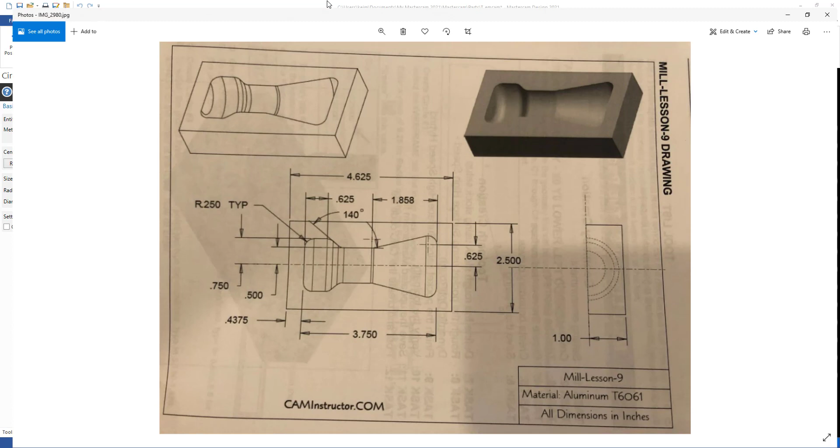I'm going to draw the right-hand arc up in the upper right-hand corner first. I'm going to select my circle and create the center point of that. I'm going to make my 0 at the edge here, shifted over this 7/16 dimension, so 0, 0 is right here where my cursor is. It just makes things easier for drawing it, and then I can translate it later. Just so you understand how my math's going to work.

We're going to start out by drawing this circle, and we're just going to take 3.75 and subtract a 1/4 inch, and that's going to give us the center of that circle. And this gives us our y-axis. So our first one is going to be 3.5, 0.625. Looks like I wasn't clicked over. 3.5, 0.625, enter. And I'll enter my diameter of 0.5 because it is a 0.25 radius.

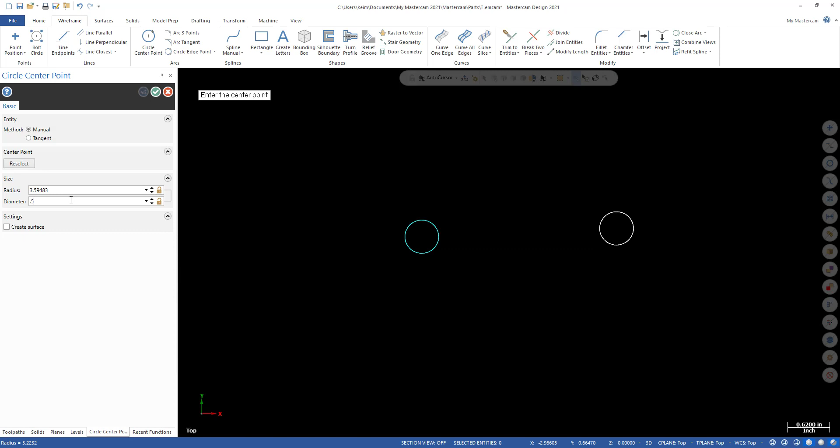My next one here is 0.625 in the x, which is actually the center. So I'm going to say 0.625, and it looks like it's 0.75 to the end, so it's actually 0.5 in the y, and our diameter is 0.5. That gives us those 2 radii that we need.

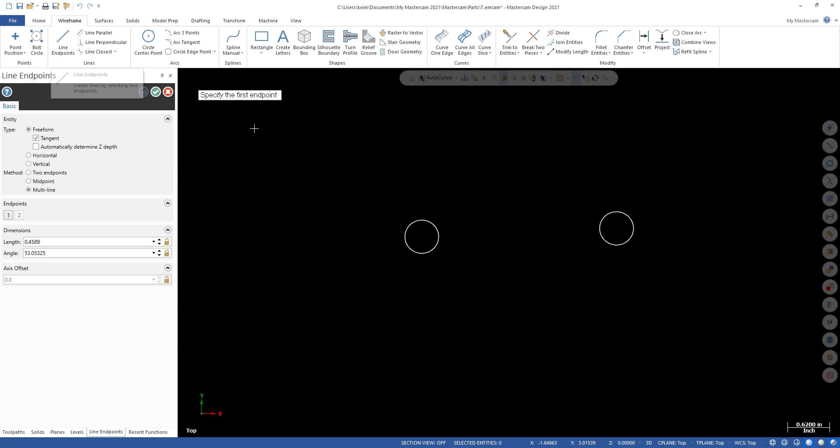Now I'm going to start with my line. Oops, I actually want to start at 0, 0, enter, and then go 0, 0.75. So that looks good. I'm just going to draw that line a little bit past, and I'll trim that up then.

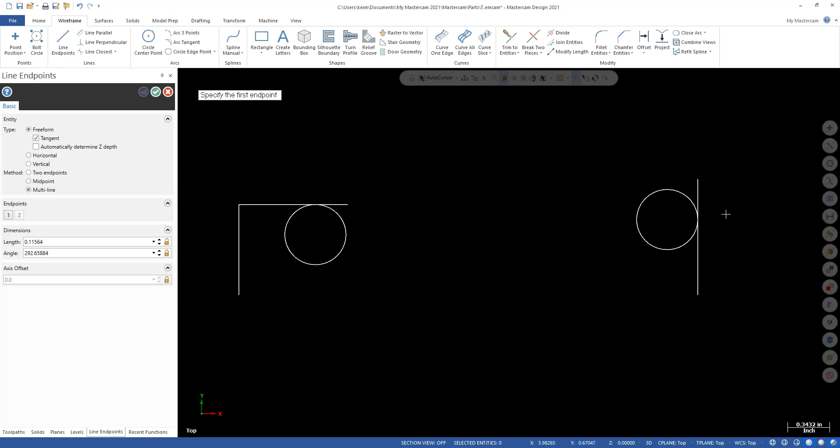Then I'm going to do my other line, which is at 3.75, 0. Actually, I don't need to specify the end; I can just draw it up past, and then I'll trim it. And then I have a line that is at 0.5. I'll start this line at 0 in the x, 0.5, and I'm just going to draw that farther than it needs to be.

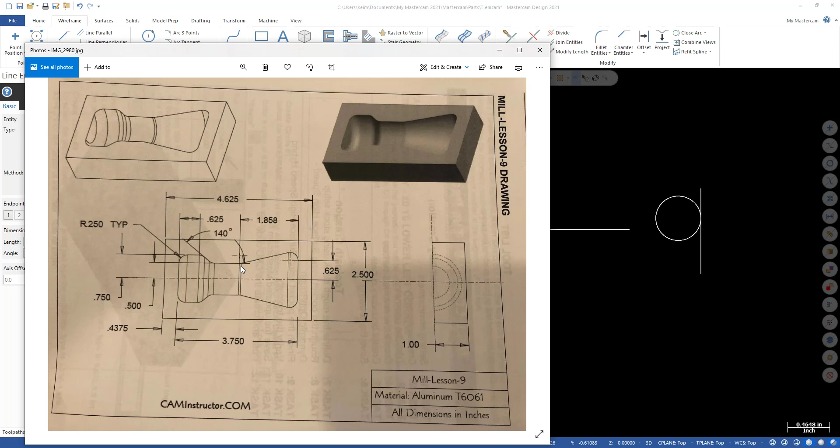If you take a look here, this angled line, if we zoom in, looks like it meets right there, but it actually meets at this radius. This is showing a radius point, even though it's really hard to see, there's a radius in here. So we need to draw that radius.

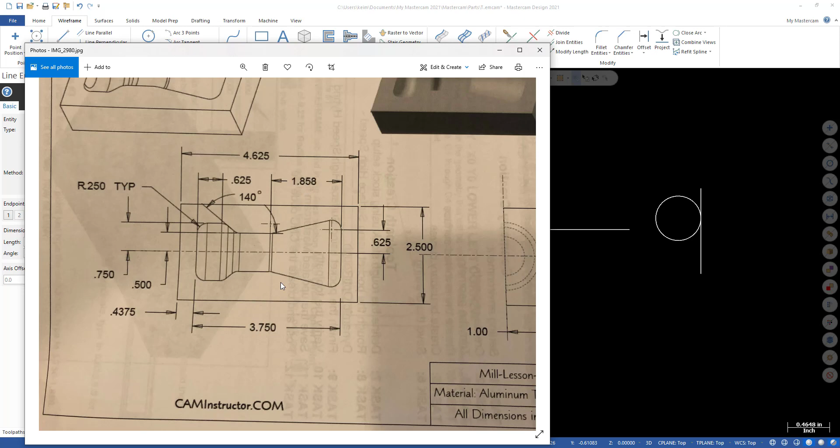So it's at 0.75 in the y and this dimension minus this one. I'm going to create that extra radius; I just happened to forget that one the first time. Let me go to my fast points, and we're going to go to 3.75 minus 1.858, 0.75 is the location of that radius. Oh, can't create it.

Let's try that again, I must have typed something in wrong. 3.75 minus 1.858, comma 0.75, enter. There we go. Yeah, I must have accidentally hit something wrong. 0.5, enter. Okay, all right.

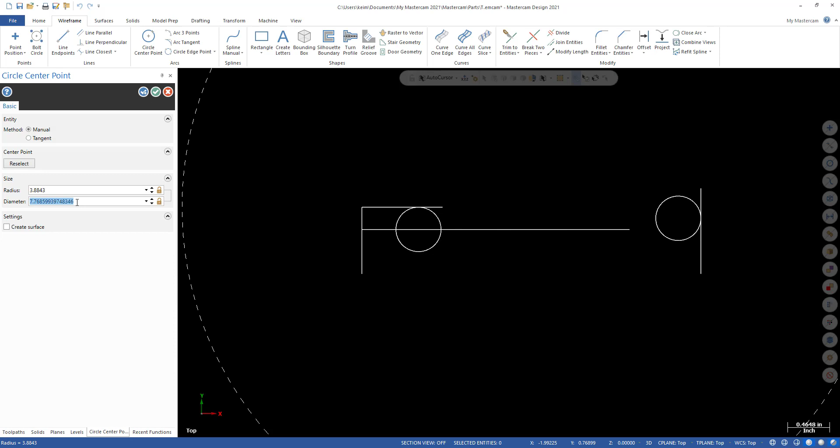So for our next line, I'm going to trim some of this up just to clean it up a little bit. I'm going to pick my divide and get rid of that. What else did I want to get rid of here? Get rid of that, and we're going to create a line here.

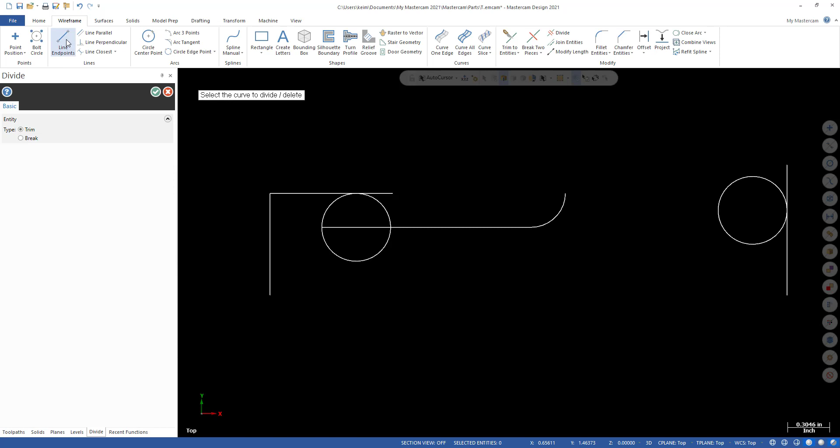I'm just going to pick a tangent, and make a line tangent to that one there. So that looks pretty good. Then we're going to trim that, trim this, trim that.

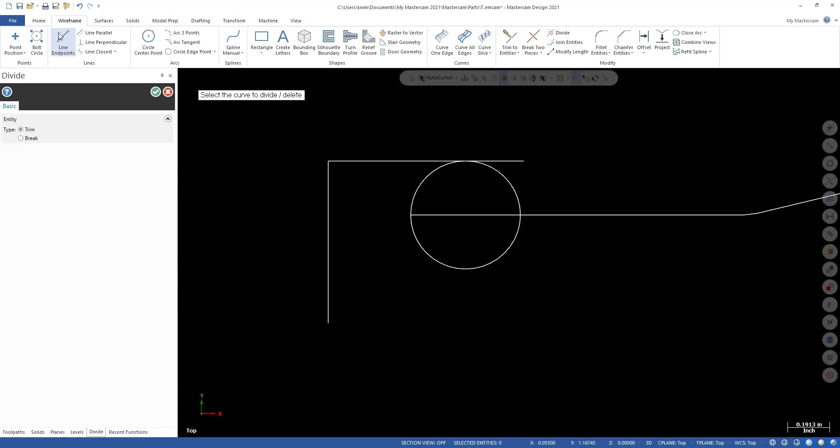We do have to create a line that is going to be tangent to this one, so I'm going to make a line tangent. And I'm going to set an angle here, because it says it's 140 from horizontal, which means that technically I would be drawing this one.

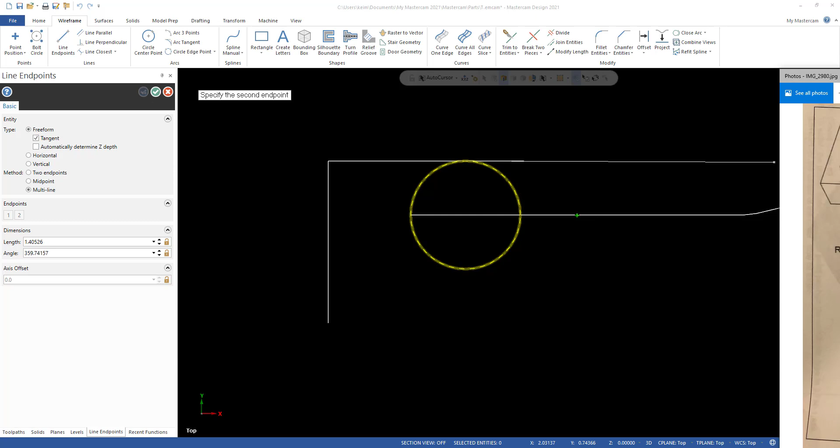This would be going, so if I'm looking at opposite interiors, let me pull this over so you can take a look at it here. So basically I'd be drawing the angle that comes down from here.

So essentially if this is 90, if I take 140 minus 90, I get 50. So it should be a negative 50 degrees here. And that should be - oh, check that. It actually should be a negative 40 degrees here.

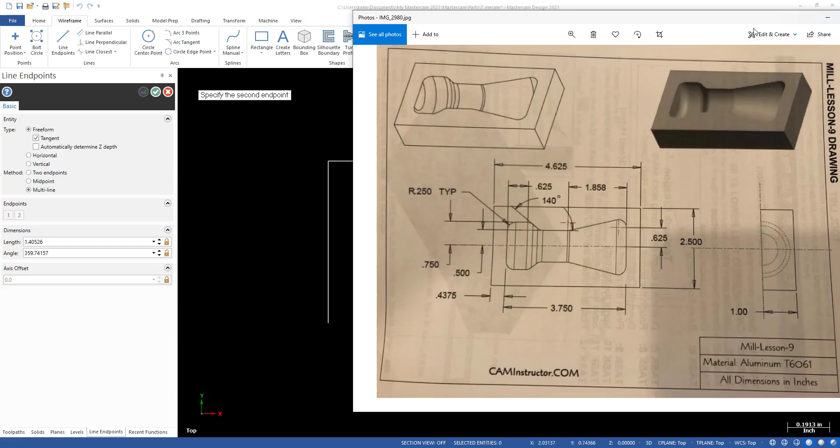Let's move this around, angle negative 40, tab. Oops, oh, we came off the wrong side. Let's trim this up before we go any further, just so we can get rid of that and not have to worry about that happening again.

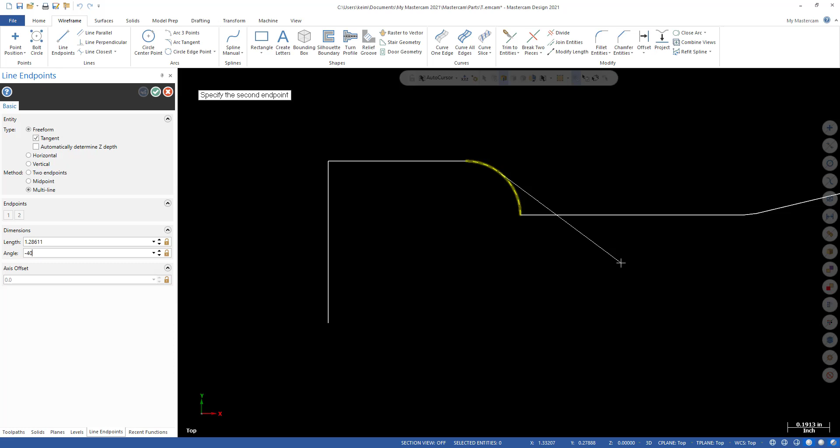All right, line, and let's put in a negative 40, point, tab. Okay, and there we go. And we can trim this. All right, and that looks pretty good.

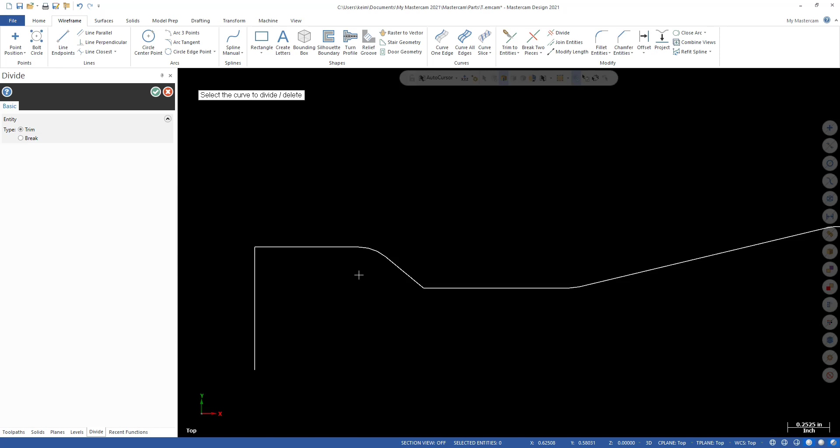So what we have there is our profile. The one thing we didn't add yet is this radius. That just needs to be added, and we need one there as well. Okay, so there is our profile.

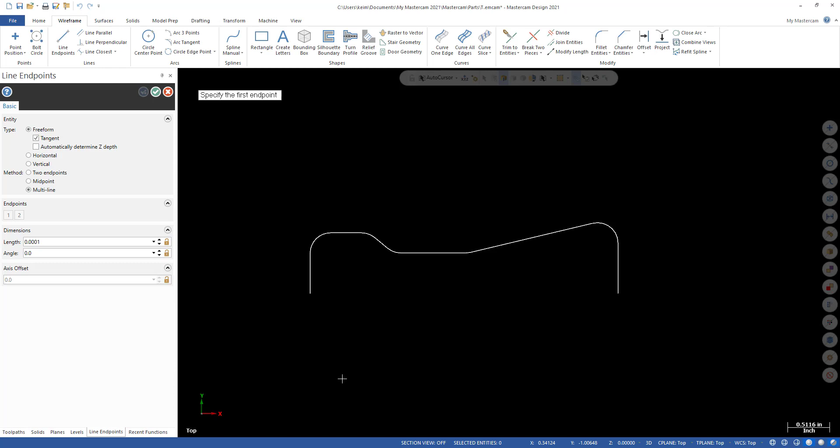Now I'm just going to go ahead and hit the check mark. And if I go into - oh, I need to connect this first. Oops. Delete. Connect to that point. Okay, good.

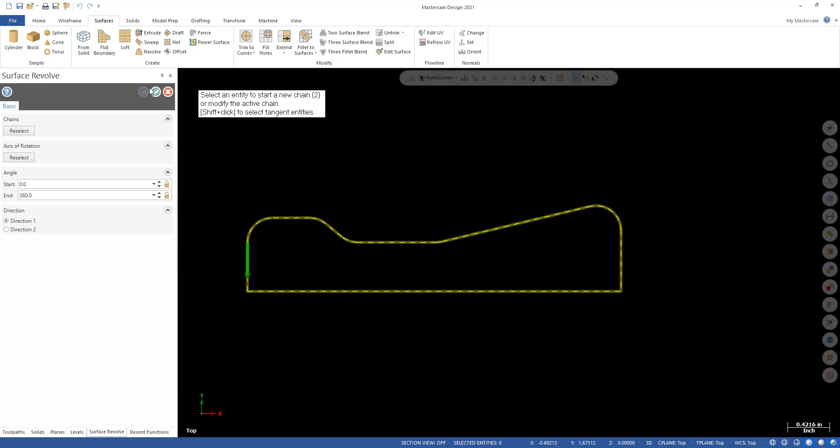All right, so now if I go into surfaces and I go to my revolve, which I seem to be missing - there it is. It says select profile, so I'm going to go ahead and select this profile. Hit check. Enter.

Axis of rotation, that's going to be this one. Now you can see it gives me this full 360 degree. Now of course I do not want that. I only want 180, so let's put in 180 and see what that gives us.

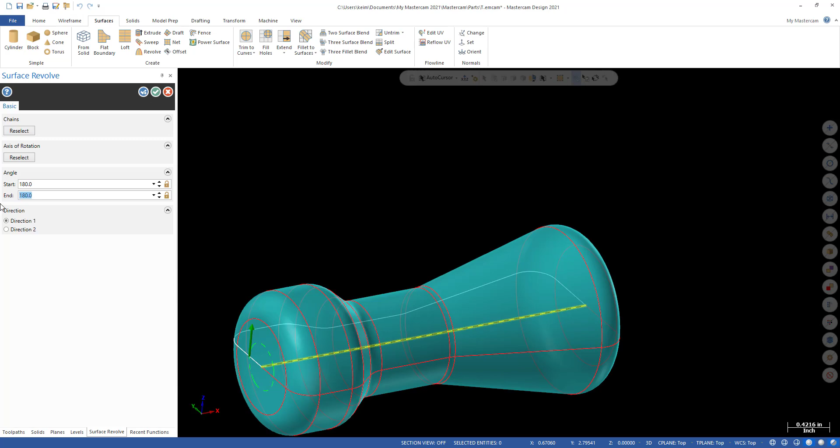Okay, so that's the opposite side. So we want to start at 180 and go to 0, and that's going to give us the correct axis. Notice that my z-axis is pointing up, so I'm going to be able to machine the inside of this. All right, so I'm going to go ahead and hit check.

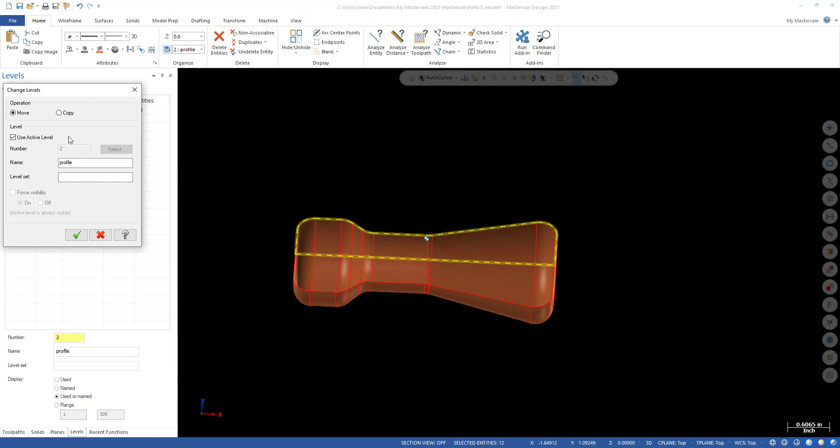And I'm actually going to grab that profile real quick and put that on a different level. And generally I create this, but I just forgot at the beginning. Okay, and let's go ahead and move that to - yes, check. All right, so now I can just get rid of that if I want, and I can toggle it on and off.

So I like that. All right, let's go ahead and hit top. I'm going to toggle this back on real quick. I'm going to turn my axes on, so I'm going to go view and show my axes just so I know where I'm at in three-dimensional space.

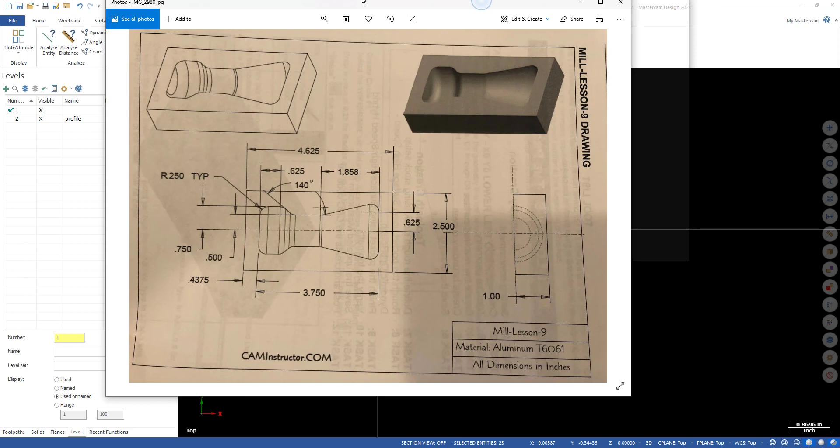And I'm actually going to move this part so that my 0,0 is in my upper right-hand corner. So what I'm going to do is take a look at this print, and I need to shift it over in the X 0.4375, and shift it down in the Y 1.25 to get it to where I want it. So let's go ahead and do that.

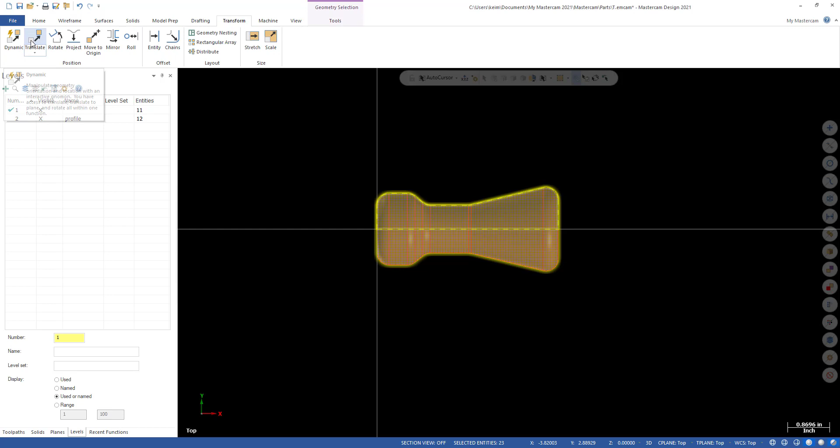Let's go to transform, translate, and I'm going 0.4375, tab, and my Y is going to be negative 1.25, and I'm going to move this, not copy it. And I'm going to go ahead and hit check. Okay, so now my part is exactly where I want it.

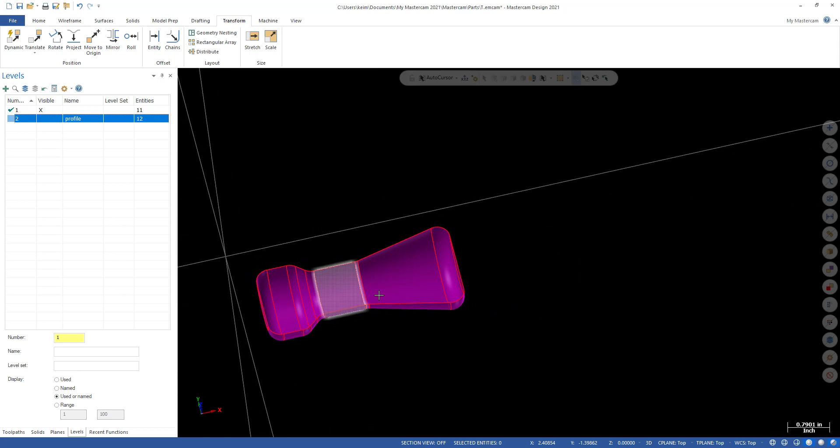I'm going to toggle my profile back off. I can go in here and hit clear colors, so it goes back to my normal color. And now I'm going to go in and set up my stock. Obviously, to do that, I first need to select my machine. In this case, I'm just going to select the default machine. I have my default set so that it automatically gives me a 1 by 1 by 1 cube for stock.

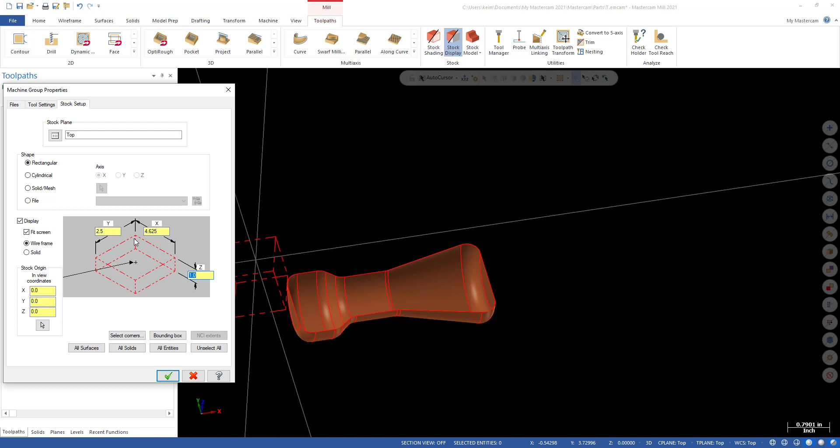But I can go in here and I can edit that, obviously. So my y-axis needs to be 2.5. My x-axis needs to be 4.625, and I believe my z-axis needs to be 1 inch. Yes, it does. And my corner is going to be right up here. And I'm going to hit check. And there we go.

So I have my stock set up. My part is ready to go. And we are ready to start creating toolpaths. So let's begin with these toolpaths.

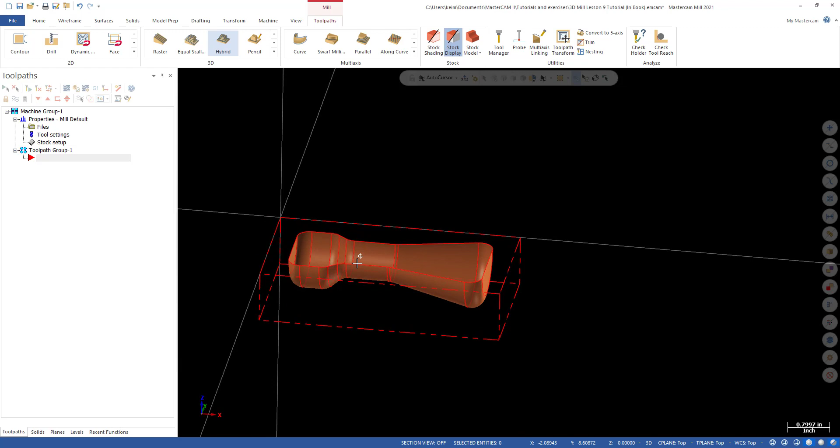The first one we're going to start with is an OptiRough, and this is basically going to remove a bulk of the material. So if you think of this as kind of a pocket in here, we're going to remove most of that material. We're going to leave just a little bit on all those faces to come back and take a finish pass.

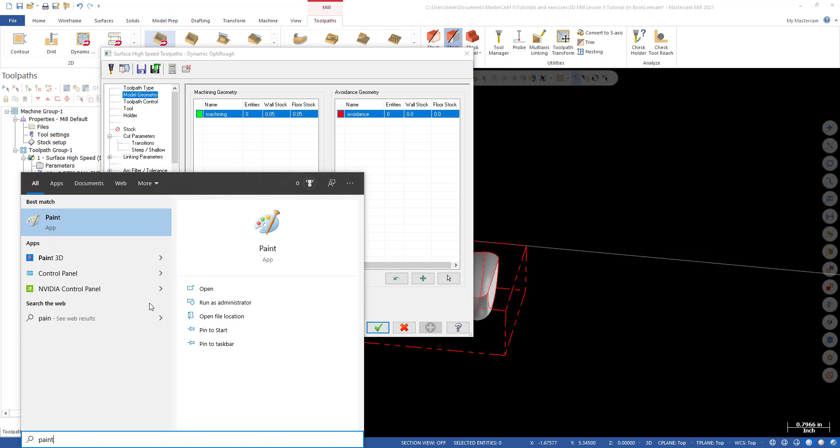So I'm going to go into there and select my OptiRough. I'm going to show you another thing that this does here. So if we have a pocket and it looks something like this, okay, and let's just say that's 1 inch deep.

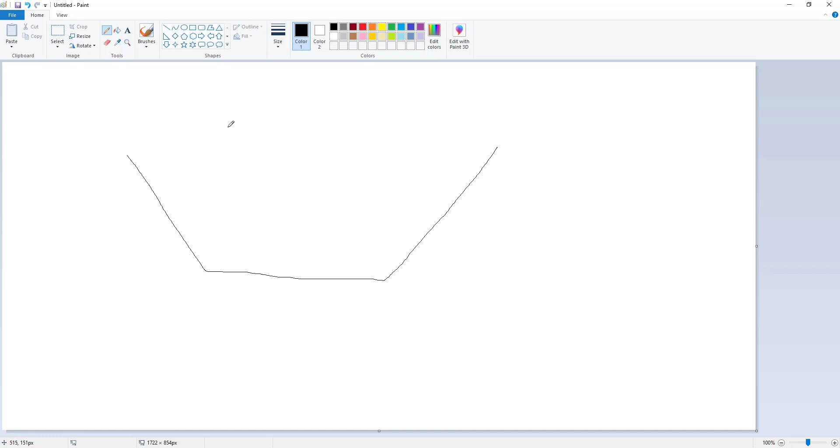What our OptiRough will do is it will take step downs and then step ups. So let's say we can rough a full 1 inch out with our end mill. Our end mill has a 1 inch length of cut, or maybe a 1 1/4 length of cut. And let's say this is an inch from here to here, and this is kind of like a cross section of our pocket.

So what it will do is our end mill will come down the whole way and it will rough out everything in here, so it'll rough all this material out. And then depending on what we put for our step up, it will step up. Let's say we put 100 thousandths in there. It will step up 100 thousandths and rough around the whole thing, roughing all that material out.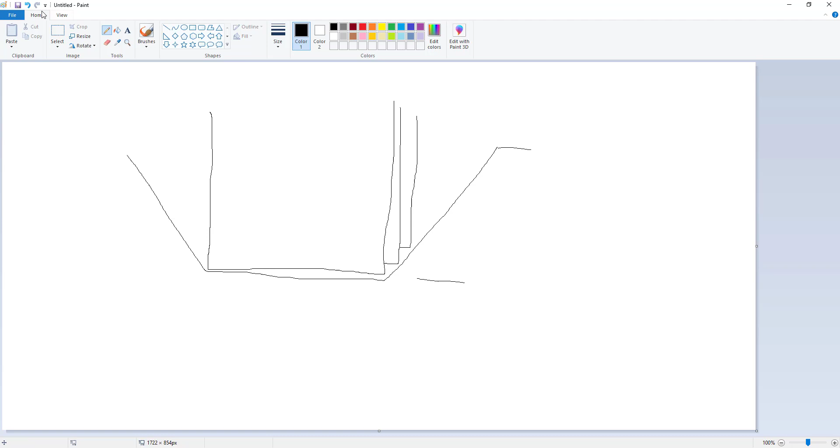And it'll keep stepping up 100 thousandths so that it only has to make perimeter cuts. So it only needs to go around the perimeter one time and one time again. Rather than if we didn't step up and roughed 100 thou down at a time, it would have to rough all this area, and then all this area, and then all this area.

So it gets rid of material a lot quicker. It's a lot more efficient way of doing it because we get rid of all this in one pass, and then we can just do a pass around the perimeter to get rid of all these 100 thousandth steps. So that's how it becomes more efficient.

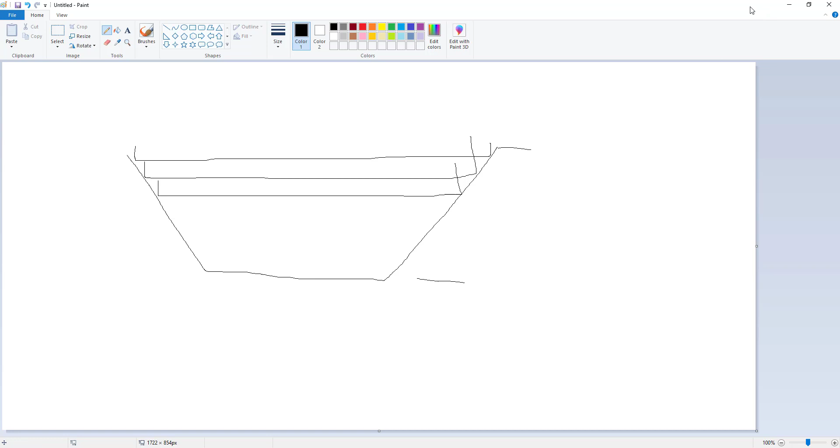So let's go ahead and select this. These, it's not obvious where you select your boundaries and your surfaces. So right here is where you're going to select your surfaces. So your machining geometry, we're going to want to select that and click this little arrow right here.

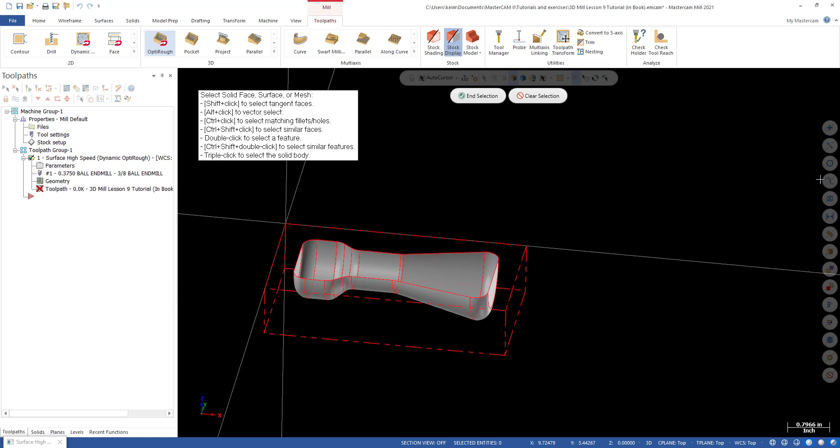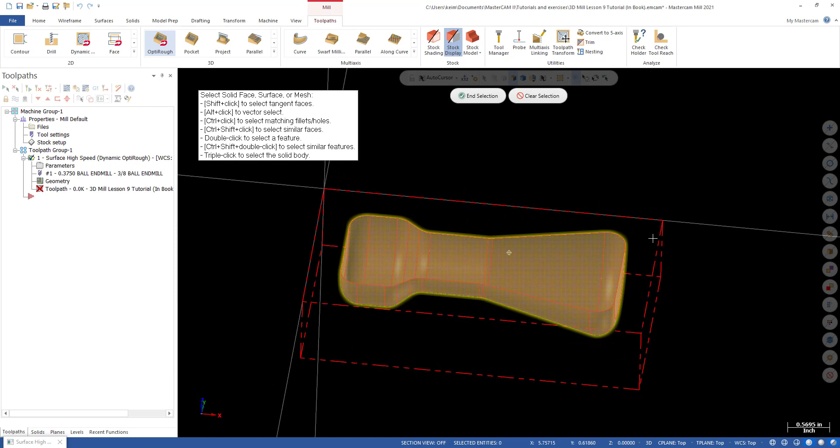And I'm going to click that, and go over, and I can either select these all manually, one by one, but there's some that are small and you have to zoom in to get them. So the easiest way is to use these selection methods over here that I showed you guys in Mastercam 1. We can just pick select all surface entities, bam, and I have them all. So I'm going to hit End Selection, and I have 11 entities.

That's perfect. Now, in here is where I'm going to select how much I want to leave on all my surfaces. So for the wall stock, I usually select 0.01, I usually leave 10 thousandths. I think your book has you leave 20 on. That's fine too, there's nothing wrong with that. It just depends on how much you want to leave on. And I try to leave somewhere between 10 and 20 just because you don't want to leave too much where your tool's going to deflect when you're cutting it later.

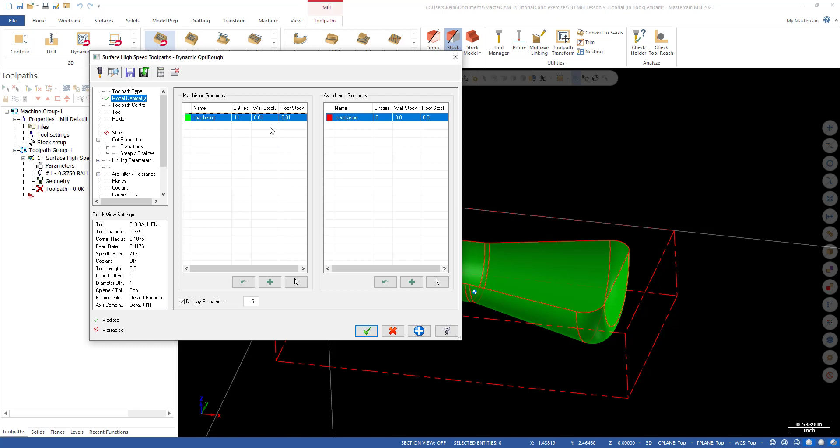And you don't want to leave too little where it's not going to cut at all, it's just going to kind of rub. And you'll end up with marks left from where you were roughing it. So you don't want to do that. You want to have a nice clean surface created by your finish tool.

Okay, so moving forward, I'm going to go to my toolpath control. Oh, and okay, so right here, if I look and I just hit include silhouette boundary, and I hit check, and I regen this path, it really doesn't know where to go. It needs a boundary in here.

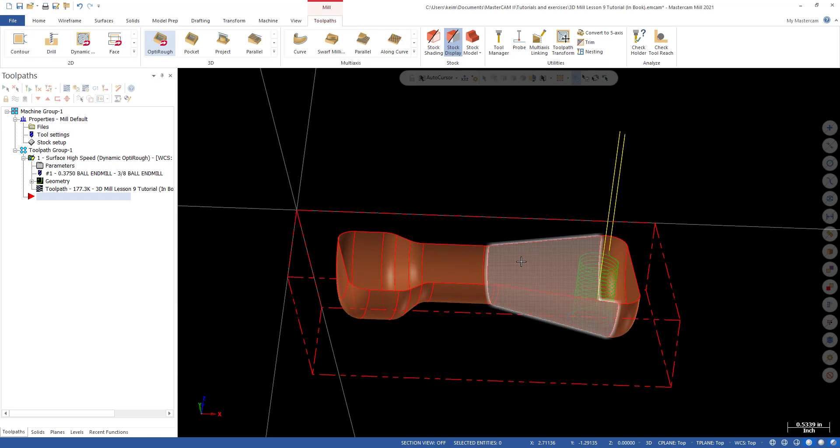So what I'm going to do is hit stay inside, and let me hit inside here, and let's regenerate that.

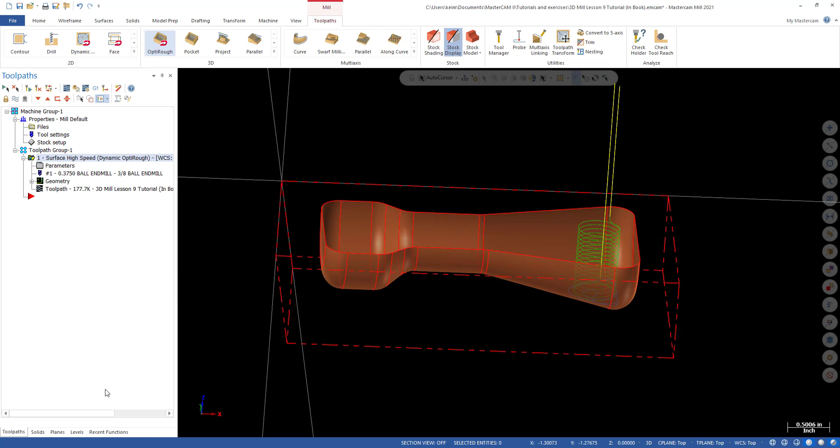So what it needs is a silhouette boundary. It needs to know where the boundary is in this thing. So I'm going to go to my levels and create my boundary, just going to call it boundary. And I'm going to create that by going to wireframe and hitting silhouette boundary. I'm going to select all my surfaces again, hit end selection, and hit my check mark. And it will create a boundary around that surface.

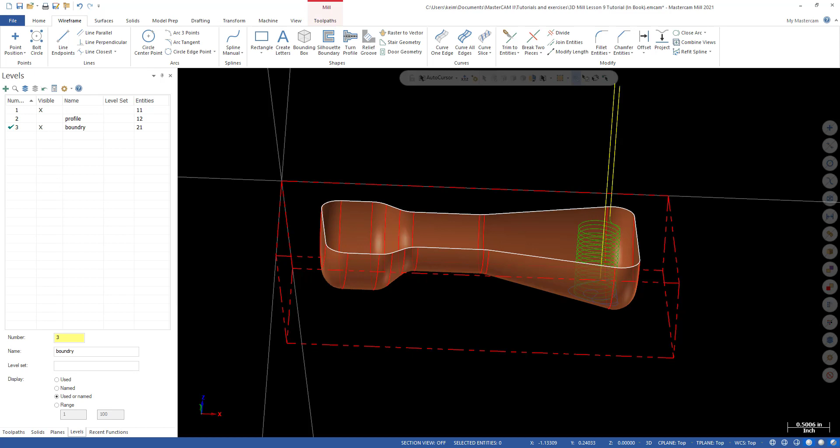So now that I have that, I can go back into that toolpath. Normally I would want to do that beforehand, I just happened to forget. So I'm going to hit check. Okay, so now that we've selected that, that looks good.

I'm going to hit strategy. I want to stay inside of this pocket, so I want to compensate to the inside. I don't want to compensate to the center or the outside, not for roughing anyway - we'll change that when we come to the finish. Include tool radius, yes. And skip pocket smaller than 0.55 - that's fine, we don't have to worry about that really.

I'm going to select a 1/2 inch bull end mill with a 1/8 inch radius. This is going to give me a semi-nice finish. And I'm going to go with a feed rate of about 60, or 60 inches per minute, and of course our spindle speed is going to be 12,000. And I'm going to make my plunge rate 50 inches a minute because I'm going to helix in here so I can go pretty fast.

And I'm going to rapid retract as well. I don't need the stock because I'm not doing any rest material. I want to climb mill, and everything here looks pretty good. By depth, that looks good.

Okay, so my step over, how far I'm going to step over, I can change that depending on how deep of a cut I'm taking. So for this one, I think I'm probably going to take 35% step over. And my step down, I'm going to take 50% of the cutter, so I only take a 1/4 inch. I could easily take more than that, but just for this tutorial, I'm not going to take much more. I'm just going to take a 1/4 inch depth of cut. This isn't very deep, so I don't really need to go that deep.

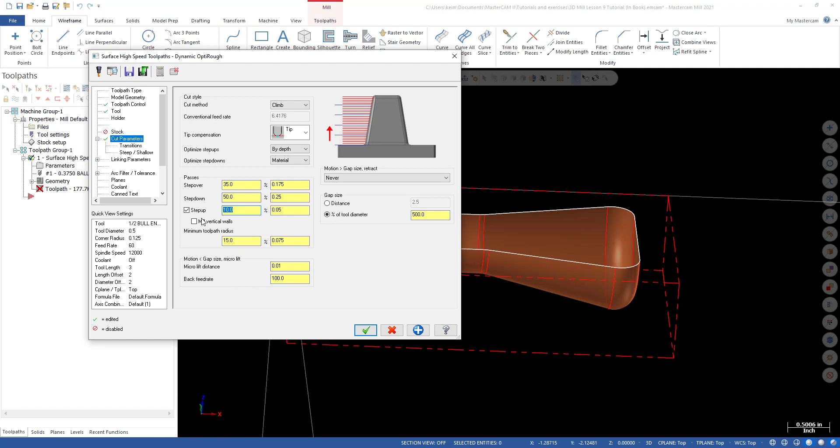Step up - now this is the step up that I'm talking about. For this one here, I'm actually going to leave this at 10% and step up 50 thousandths so that it cleans. It's going to give me a smoother surface finish here. That way I have less to clean off when I do my finish pass.

This minimum toolpath radius, this is fine. My back feed rate - so if it makes a cut and then has to circle around again to start the cut from the beginning so that it climb mills the whole time, this is the speed that it's going to circle back with. So I can make this 500 because that's the max that the Haas post will allow. But I actually have a new post that will allow us to do 800 there, which is basically the max that the machine will allow.

Okay, so let's go ahead. We don't need mill vertical walls on because we don't really have any vertical walls there.

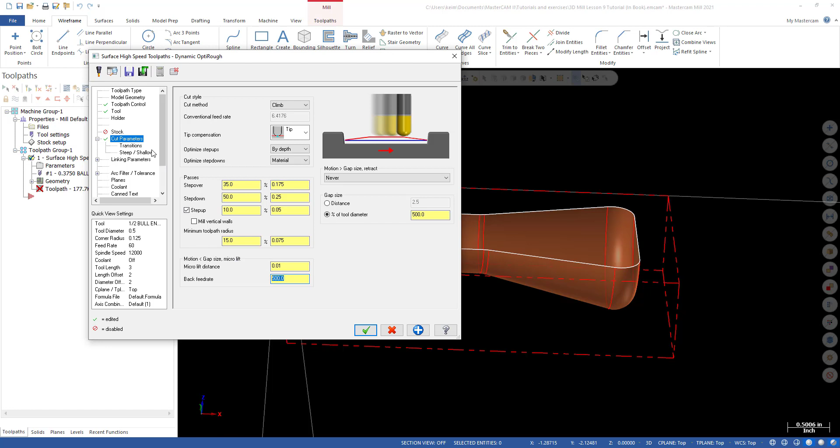Let's move on to transitions. So in transitions, we are going to keep it on helix, and we're actually going to increase this to 0.25 for that helix. And let's see, plunge angle 2 degrees is good. Trying to think of what else I want to change there - everything looks pretty good, so that looks good.

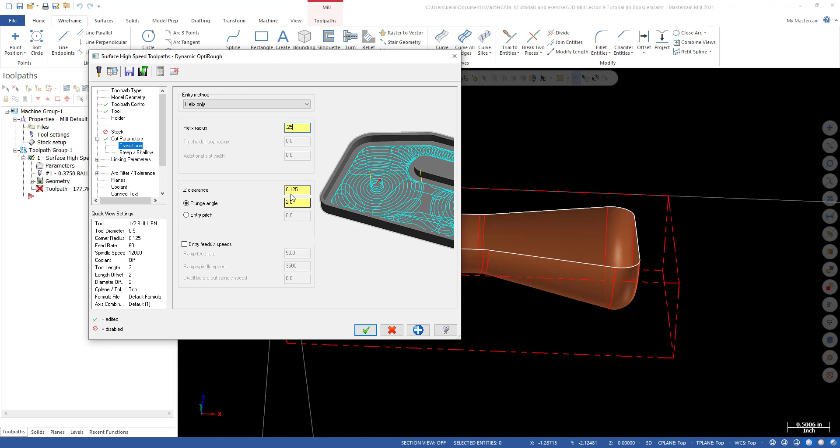Steep shallow, we don't need that for this one. Linking parameters, I'm going to change this to 1 inch because we don't really need it - I mean, I could even turn this off honestly.

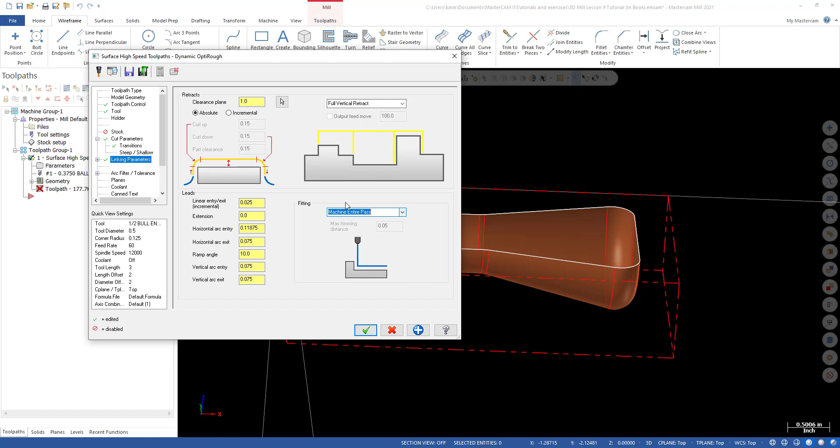We're going to minimize the trimming here - no wait, we're going to actually change it to machine the entire pass. We're going to minimize the trimming on our finish pass instead. And arc filter, yeah, we're going to change this up a little bit. So let's change our arc filter - we're going to change this in all axes so that it'll create arcs for us.

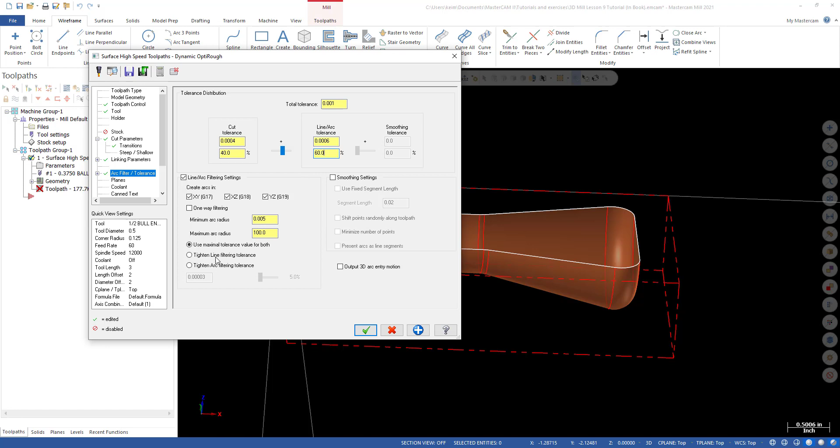And I'm going to make this 40% like it is in the book. And I'm going to make that 60. Maximum arc radius is 100 of the cutter. And everything in there looks good. Okay, so I'm going to go ahead and hit check, and we're going to regen this. And it should look pretty good. If it doesn't, we'll have to go back and check. But that looks like what I want to see there.

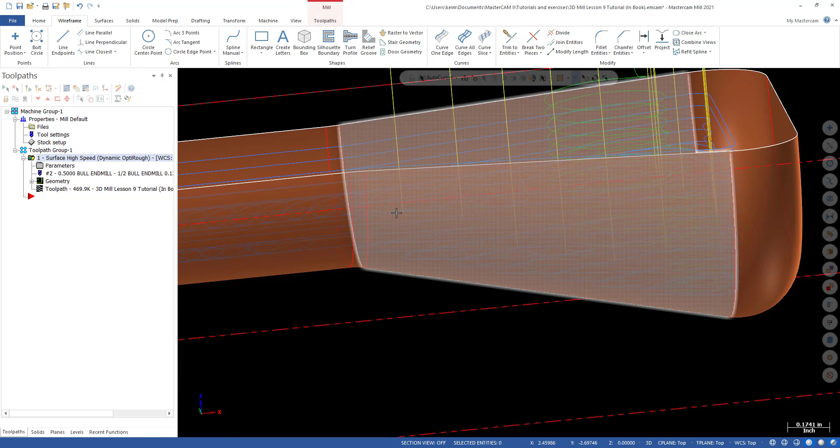So you can see here, if I zoom in, it's actually hard to, okay, so you kind of see here, if I don't select that. So you see the swirls here. That is that swirl pattern right there. That's the first depth cut. And then you can see down here we have another one. That's another depth cut. And I think there's one down here. And then each one of these solid lines are just a step over. I'm sorry, they're the step ups. So that's what's cleaning up closer to the edges.

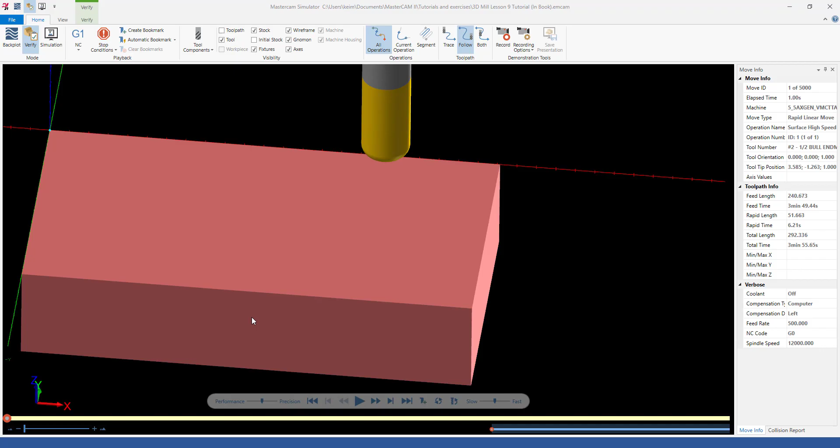Okay, so we have our path there. Let's go ahead and simulate that quick just to see how it looks. So it looks pretty good. Yeah, I can't complain about that. Got rid of most of the material. We stepped over, took most of it out. Now, you'll notice that it left a little more on here. That's because it really can't get in there. And we're going to talk about that when we do our finish pass.

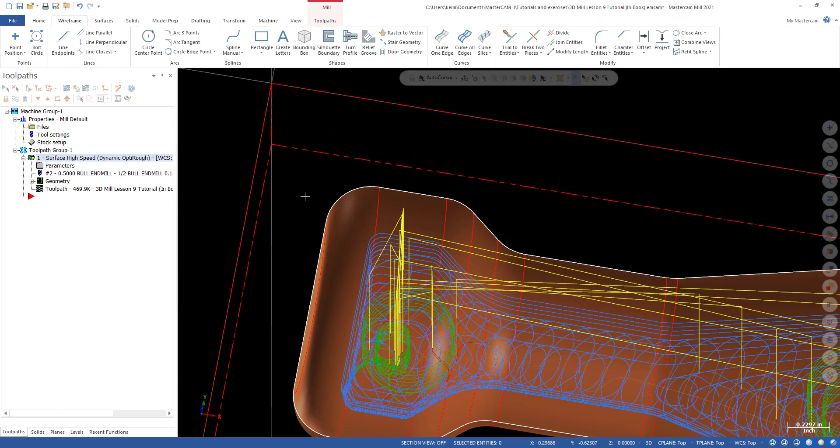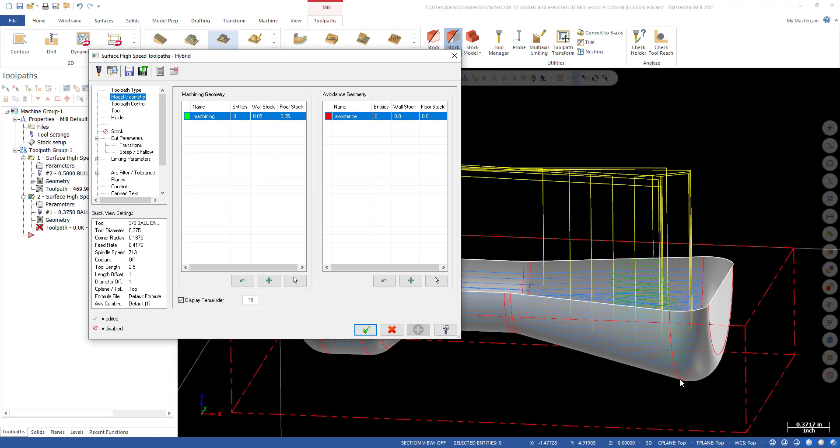So let's move into our finish pass. For this, we're going to use a hybrid method. Basically, the hybrid method allows us to split between flat surfaces and vertical surfaces. So it's good for transition surfaces, where you have something that's almost vertical to something that's basically almost flat, kind of like at the bottom of these arcs. So once again, I'm going to select all of my surfaces, and I'm not going to leave anything on the walls this time.

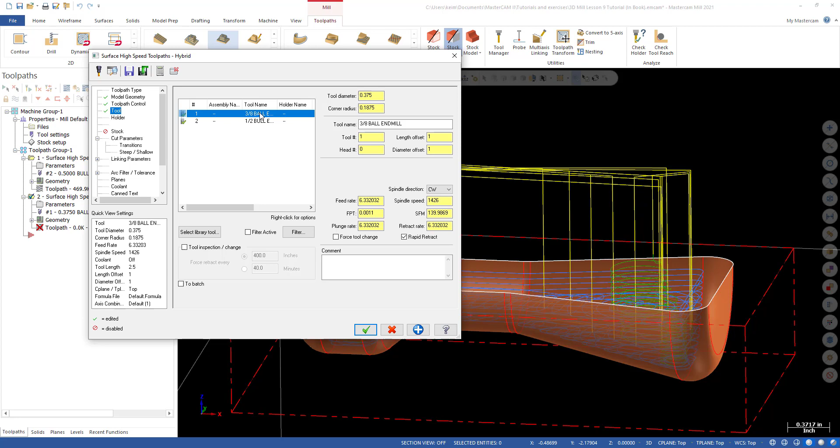Toolpath control, we are going to pick our silhouette boundary again. And tooltip. Okay, so we're going to contain the tooltip. We are going to go on center this time. So I want the tooltip to be right on center when it goes around this line. Tool, I'm going to pick a 3/8 ball mill. Now, I know that your book has you pick a 1/2 inch. There is a very specific reason why I am using a 3/8 end mill. And that is because all the radii in the corners are 1/4 inch.

So when it goes in here to cut this, it's going to be engaging more than 90 degrees of the cutter. So basically 1/4 or more of the cutter in this corner and in this corner. You're going to end up with chatter. So you don't really want to do that. I always like to pick a size smaller ball mill for my finish than what my minimum radius is. And you should do that as well.

My feed rate, I'm gonna pick 100 inches a minute for this, because remember, I'm not cutting anything. I only have 20 thousandths on there. So I'm not cutting a lot. Obviously, this is max, we're in aluminum. My plunge rate, I could do that at 30 inches a minute. Stock, we don't need that. Okay, so we want to make sure we climb mill around this whole thing. I want to optimize the cut order.

Our Z step down. I believe in your book it's using 10 thousandths, and I'm going to follow that. This is what's going to control how good your finish is. It's also going to control how long it takes to regenerate the toolpath and how long it takes to machine. If your Z step down is 10 thousandths, that means it's 10 thousandths between step downs, I should say, in this one, because the hybrid toolpath separates step downs from step overs. So we're going to step down 10 thousandths, and that'll be fine.

The limiting angle, this is the angle it uses to limit the difference between step down and step over. So I can control the step overs on these flat surfaces separately with a 3D step over from the vertical Z step down. And the delineation point is right here. I control that as well. So I'm going to make that 45 degrees. And I know your book has you do a different step over for this, but I'm actually going to keep that at 0.01. I like it to be consistent.

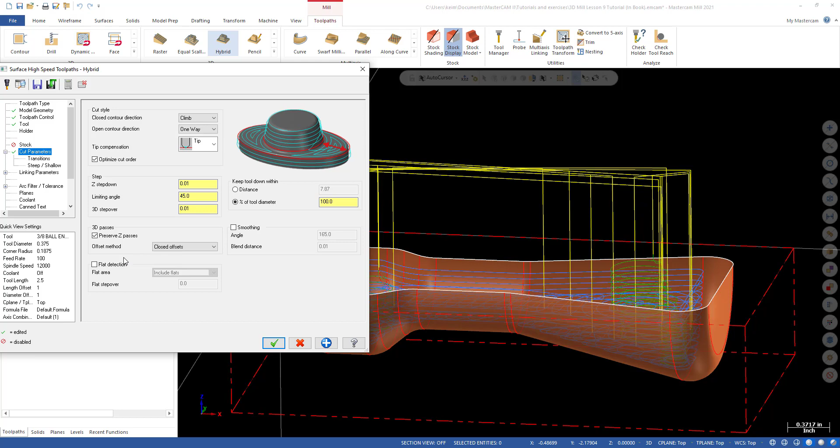Okay, so our 3D passes, we're going to use closed offsets like your book does. Basically, that just means it's going to see this as its own boundary, or its own chain, I guess. And everything there looks pretty good. And I'm going to go into some of these other things that we're not using a little bit later in other tutorials.

Okay, so we're going to tangent ramp. Steep shallow, we don't need that on. Our linking parameters, we'll just change this to 1.0. We are going to minimize the trimming on this one, and we're going to keep the full vertical retract on.

Our arc filter. We're going to turn on our arc filter, and we're going to use XZ and YZ as well. Basically, what this does is it tells the Mastercam post what we want to turn into arcs and what we want to use tiny little line segments for.

So basically here, if I turn on smoothing as well, I'm going to make the tolerance 33.0, and I'm going to basically follow exactly what your book did, and I'm going to use 33 for this one, 0.0. And there we go. And you have to fill these out left to right, or you'll never be able to get these exact divisions.

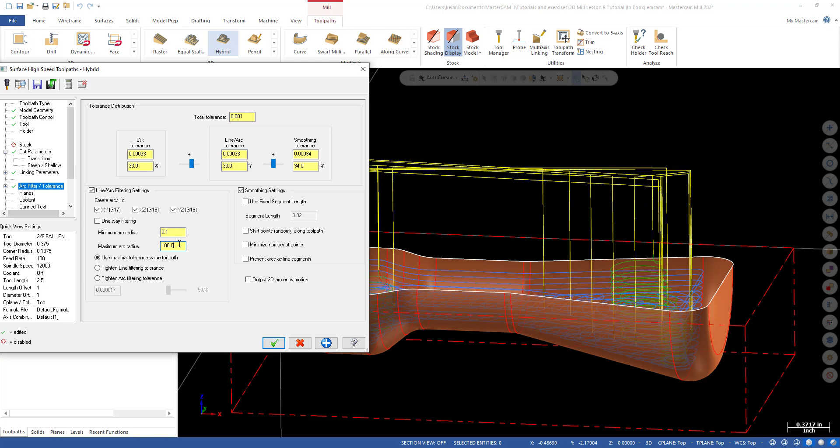Okay, for this here, the minimum arc radius, this basically means the minimum G3 or G2 code it's going to post is going to be 0.1 in this case. So it won't post an arc smaller than that. Anything smaller than that, it'll just post as small little line segments. And everything else there looks good.

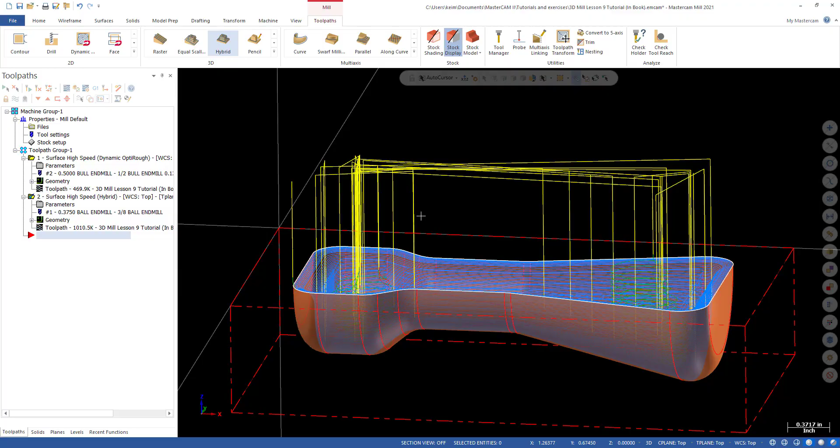Okay. So let's go ahead and hit check, and let's see what we get there. And you can see here, this means it's regenerating. These take a while. So try not to get impatient and start clicking around like a madman, because it will eventually regenerate depending on how fast your computer is.

One thing I wanted to note, you'll see that these look like they're coming through. That's just because this is a surface and it's infinitely thin. So that is fine if you see your toolpath through the bottom of here, especially if you're using a surface. If you're using a solid that's coming through the bottom, you got a problem. But surface, you're good to go.

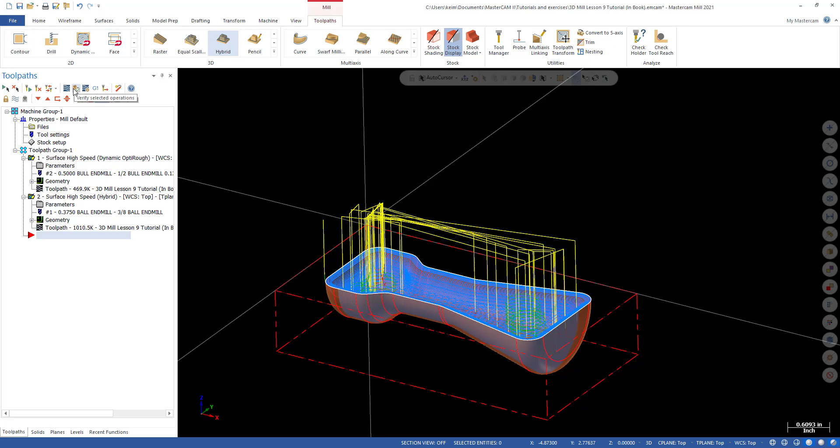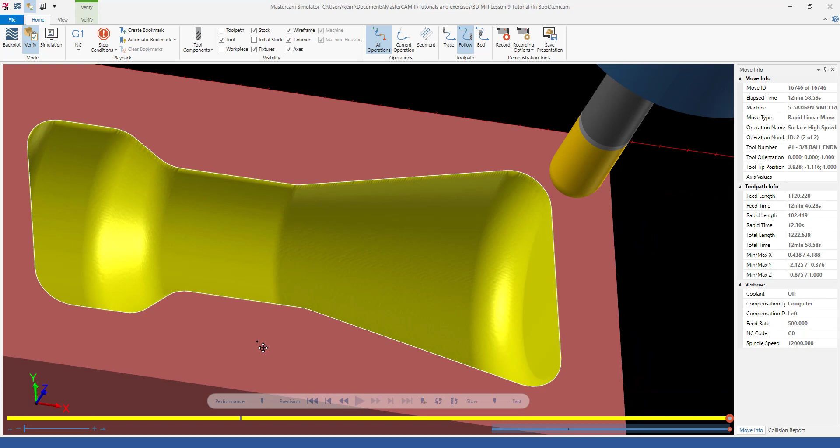All right, so I'm going to select those, and let's go ahead and preview it. You can see there's our finish pass. It's cutting it all out pretty smooth. Okay, so take a look, and you can see our surface finish looks pretty good. It's only as accurate as the graphics, obviously, but it does try to represent what it would look like. You can see the passes there. It looks like ball mill passes all the way around. Yeah, it looks pretty darn good.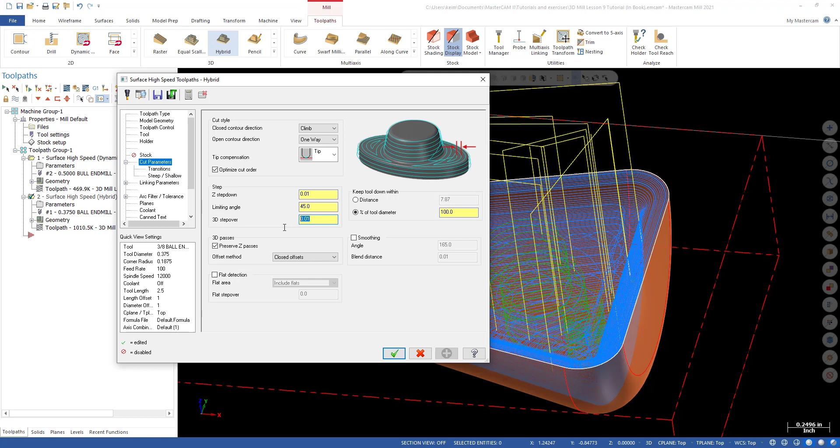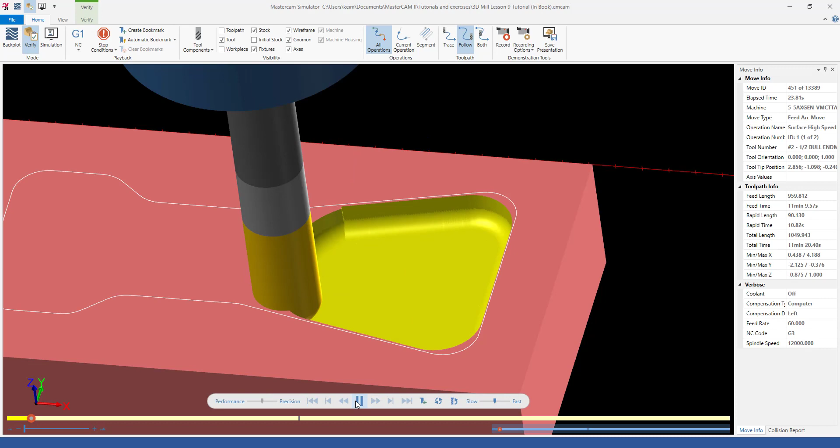One thing I do want to show you before we end this video is what this looks like if it's changed. 0.0, what was it? I think they did 0.02 in the book. So it's basically double. So let's regen that. And of course it'll take a second here. And let's see that surface finish, see how much different it looks, if at all. It's not a big change, so it might not make too big of a difference.

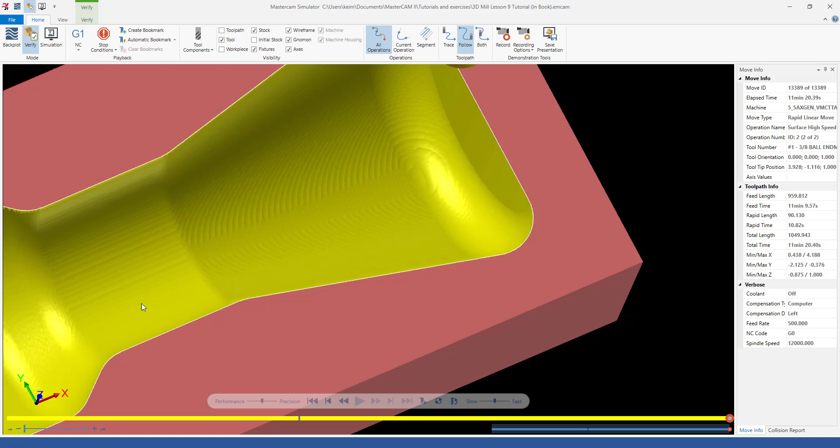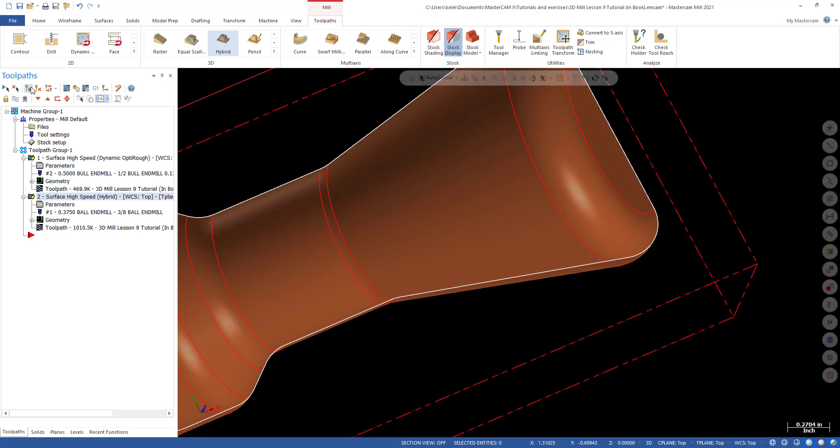Ah, yeah, it does make a difference. So you can see now how coarse the step over is down there compared to up here, right? It's pretty obvious, actually. So that's the difference it makes if you don't have a consistent step over. It will definitely affect your finish. But there's a happy medium there. The smaller you make that number, the longer this thing is going to take to simulate.

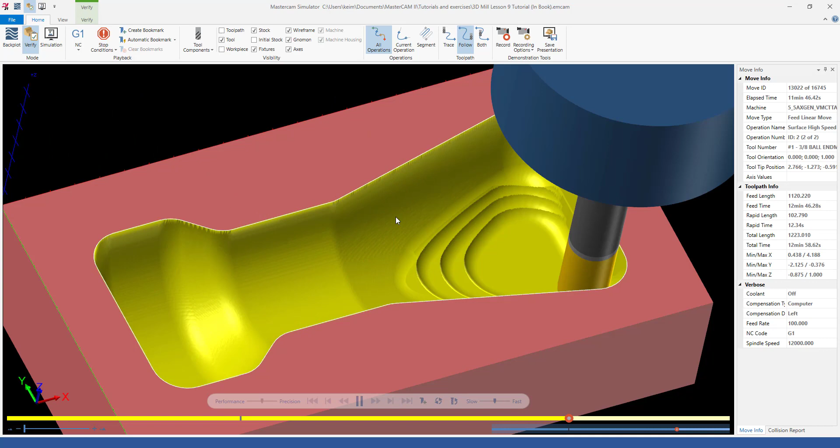So right now, I'm not sure what our last one simulated at. Let's take a second here, and we can actually see over here. It looks like this is going to take a total of 12 minutes to machine. And of course, that's not accurate in the real world, but by comparison to the other one, it will be. So you can see that the finish is much better. So this is 12 minutes to machine. We got a nicer finish.

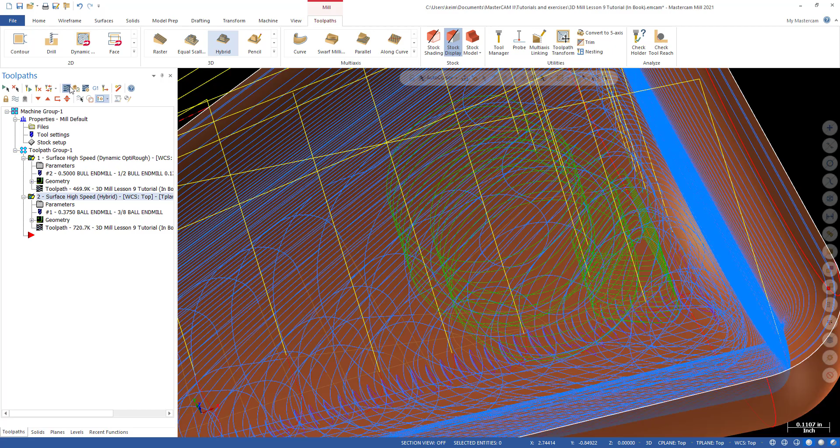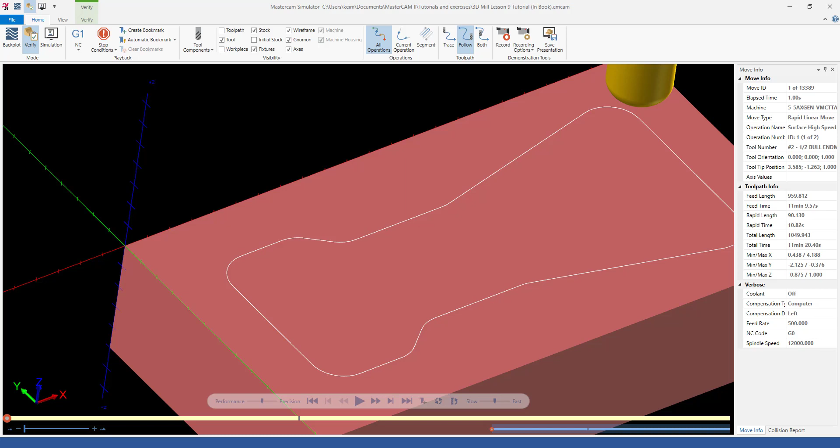But if we go back and we change that back to 0.02, and regen that, we select and backplot. And so it only took a minute off for this one because it was not a huge deal. But for bigger parts, this could change by pretty close to double. So it just depends on what you're doing and the part you're doing. But it only changed by about a minute. So I think it's definitely worth the smoother finish in this case.